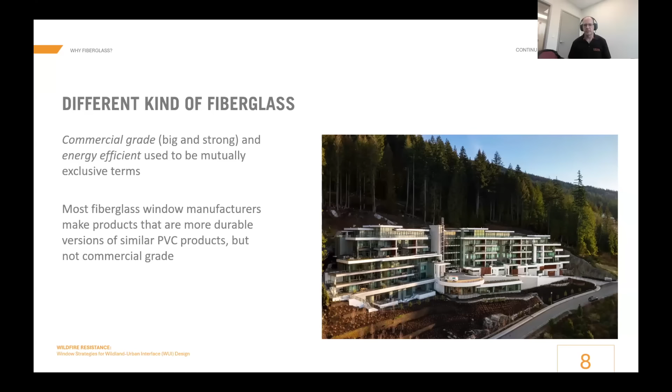Most fiberglass window manufacturers make products that are more durable, but they're more durable versions of relatively similar PVC products. Those fiberglass products are not necessarily commercial grade in the sense of the size capabilities or the resistance to exposure that you'd expect from a commercial product. So we're speaking from a little bit of a niche application here, but the material science is just science.

To make fiberglass, it's made from long strands of glass fiber combined with a thermoset resin. To use another construction material as an analogy here, you might think of reinforced concrete, where the strands of glass represent the steel reinforcing in concrete, and the resin is the concrete that holds it all together and provides a finish and maintains the shape.

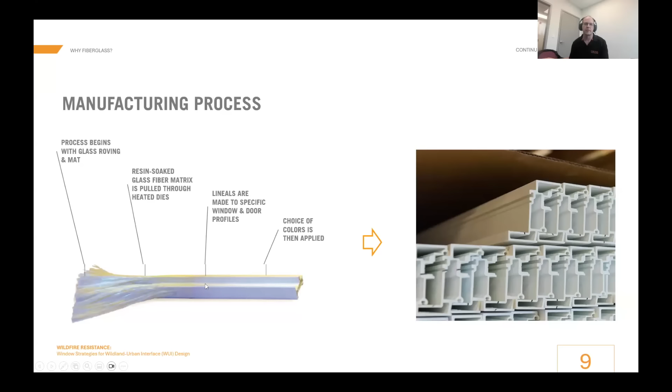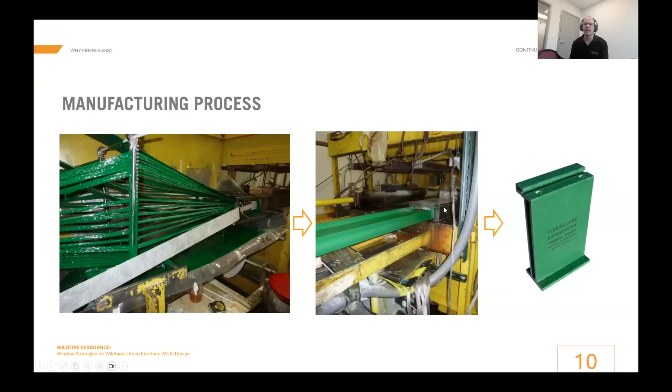The material gets pulled through a die that heats the material and gives it its shape. And finally, you have an unlimited length, two-dimensional profile that you can cut and then manufacture into anything you want.

Of course, in our case, we're speaking about window frames most of the time. And when you look at the end product you can get when you take that material and fabricate it into a window frame, it ends up giving several strength characteristics that are favorable for making commercial windows.

So about 10 times stiffer than vinyl from a structural perspective. The fact that it's a thermoset resin, and more specifically for you chemistry buffs amongst us, it's a polyester. Interestingly, that is a different form of polymer than a PVC or vinyl polymer, which would be a thermoplastic. The biggest difference between those two families of polymers is that a thermoset cannot melt or deform with heat. So we'll just pin that in our mind for a few minutes to come.

Because of its enhanced resistance and stability to high heat or extreme cold, as a finished product it can withstand extreme temperatures without deleterious effects. And it ends up with a much longer lifespan than most other materials from those fundamental properties.

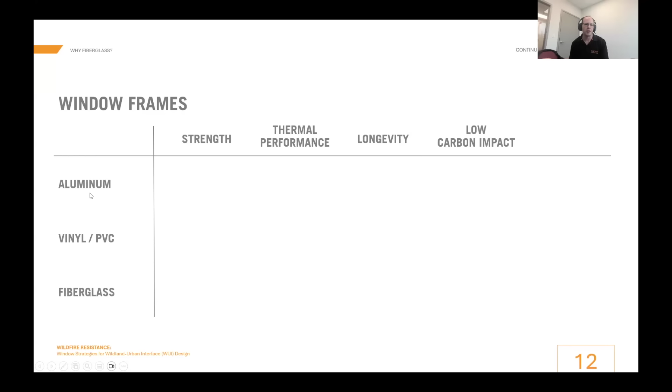So if you start to think about it, to round out the question, why fiberglass in the finished product form as window products? There's a lot of strengths and weaknesses that materials have. And when you're, as a designer or an engineer, thinking about material selection based upon the principal material in a window product, you're trying to optimize for something. You're trying to optimize - in the case you might consider aluminum, you'd be optimizing for strength and longevity.

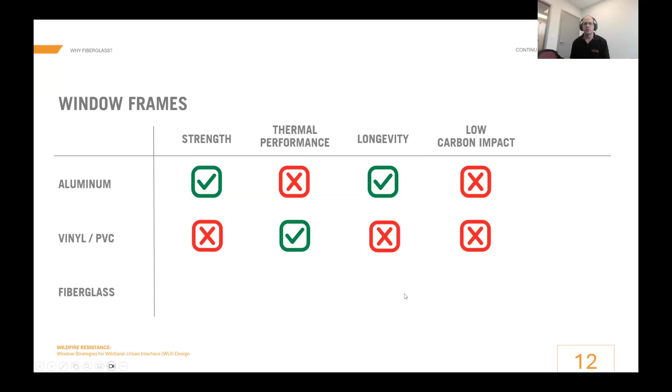If you're trying to optimize for thermal performance, your mind might go right away to PVC. If you're trying to optimize more comprehensively, you don't want any lower points, or you're looking for the lowest carbon impact, you might be looking for fiberglass.

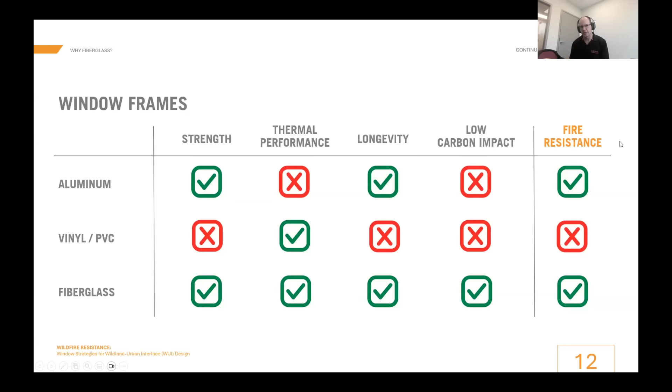But I want to introduce a fifth potential selection criteria that we all might have in this case, and that is wildfire resistance. And if that were particularly interesting to you, you'd be prioritizing metal or fiberglass, as it turns out.

So with that in mind, let's look at wildfire, and we'll start a little bit big picture here, but we'll get to focusing on windows in just a moment. So looking at wildfires, I'm not going to spend much time convincing everybody that wildfires as a problem are a big problem. They're a problem that's persistent, and it is unfortunately a growing problem. I don't need to spend 30 minutes of this presentation presenting evidence to that effect.

But a little bit closer to home, do you personally know someone who's lost a building in a wildfire? I hope it's not you personally, but we have a big crowd on this presentation, so maybe some people have. Most people do at least know somebody personally who has lost a building to wildfire. At Cascadia Windows here, we all do.

that eventually became, or was bought by, our president. Our president was looking for a building to put on a recreational property he had purchased in the province of British Columbia. He just had a tiny little fishing cabin on that. He wanted to improve it to be a big recreational cabin for his family to come and enjoy the lake.

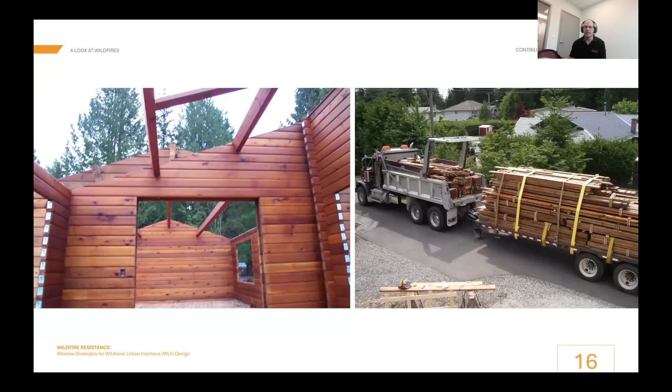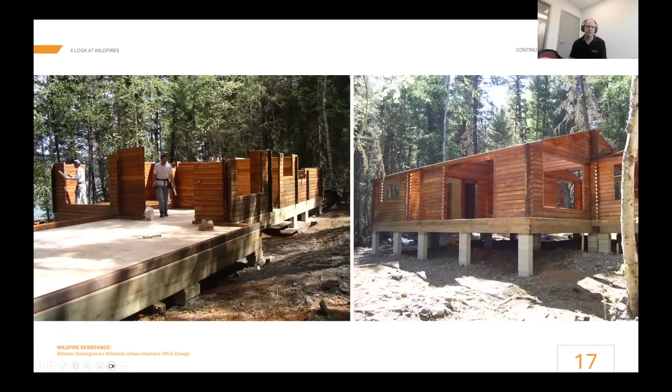So he built himself a map, labeled the materials, loaded them up, took them on a 4-hour drive outside of the city, brought them across the lake to the recreational property. Before assembling the cabin, he built a modern wood frame floor assembly, complete with a few reinforced concrete footings to receive the cabin, and then began to assemble it. And he did. It worked out quite well.

He didn't need fiberglass windows in it at this point in time. He was able to reuse the existing windows because it was just a seasonal cabin. And so he and his family enjoyed this building for about 10 years or more.

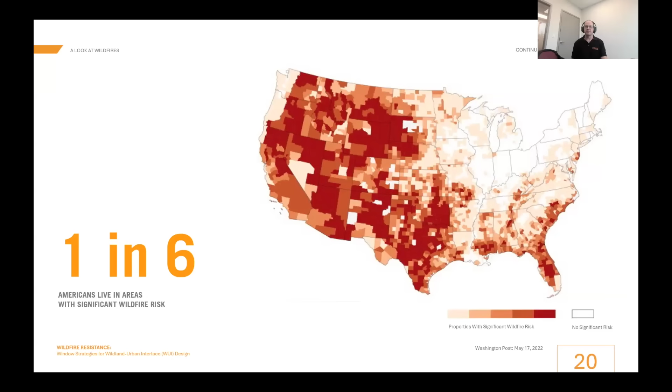So we all know somebody, and this topic is near and dear to us. But it's interesting to note that we think about this topic in terms of that cabin, which was a wood cabin in the middle of the forest. But that's not where the majority of our building stock at risk of damage from wildfire is located. About 1 in 6 Americans live in an area with wildfire risk, so that's obviously far more buildings than the odd recreational cabin in the woods.

So let's look at wildfire resistance of buildings more generally, because it is a more widespread risk. We can see, from all over the globe, that attention on this topic is intense and growing, but not matured yet. Thankfully, we can take examples like this architect in Australia who had enough of seeing communities destroyed by wildfires and decided that from that point forward, all of his buildings, as a basic aspect of construction and design, would include wildfire-resistant exteriors.

It's not building code in his area or most areas yet, but it's important enough that not only early adopters and concerned architects are getting on board with learning and implementing this knowledge, but insurance companies as well, who are doing hard math and starting to change insurance premiums in some areas. It will be logical that as building methods and products become more mature and available, insurance companies will further alter their premiums and discounts in response to the wildfire-resistant character of the buildings they are insuring.

Coming to how we see communities educating their occupants, builders, and designers for resistance to wildfire. This little extract comes from a small community in British Columbia, but I liked it when I pulled it off their website because it taught me a few things. It first showed that this concept is not just about selecting building materials that resist fire. That obviously will be a part of it, but the strategy of wildfire resistance is more holistic.

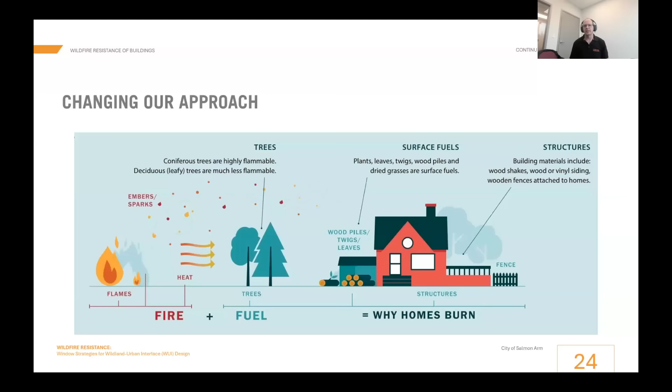This has become useful guidance as we see California, for example, rebounding from the devastating wildfires that caused the loss of many homes. It's interesting to see that studies are being done and recommendations made to include Passive House as an excellent, well-fitted design guideline for as much of that rebuilding as people are willing to adopt. So wildfire resistance and Passive House coexist quite happily. They're not dependent on one another, but we can make buildings better by implementing both.

Which brings us to windows, because they're important in both Passive House designs and in enhancing wildfire resistance. Why wildfire resistance? Because windows are a vulnerability. Thinking about the three aspects of best practice for enhancing a building's wildfire resistance: starting outside the building, there's intentionality about landscaping—that furthest-out surrounding environment piece. Then the second piece, controlling the accumulation of surface fuels, which unfortunately depends on occupant behavior—that's closer to and up to the outside of your building.

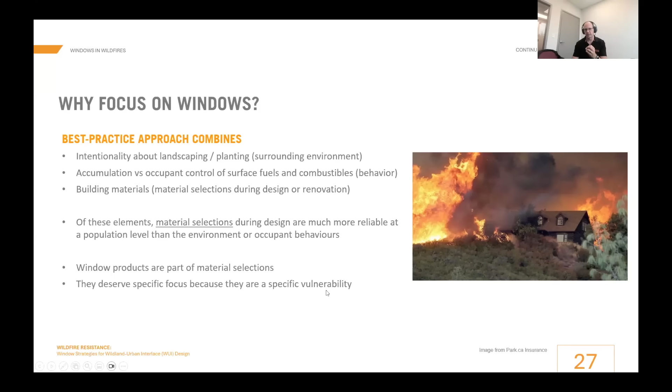Instead, we're talking about the large proportion of buildings next to a wildfire that passes by, giving off heat, embers, or small chunks of burning material that fly through the air and land on a building. If it lands next to the base of a wall, the exterior might suffer or become damaged, but the building wouldn't burn down. But if it lands at the base of a window, it might break the glass, set the frame on fire, and cause the building to be lost from the inside out. That's why windows are a specific vulnerability—they could cause the loss of a building where, if there was a wall instead of a window, the building would have survived.

And that's what happened to the building in this photo. You can see that the outside of this wall, left and right of the window, has not been subjected to a massive inferno of a wildfire completely engulfing the building, yet the building was still lost. It's easy to project that the windows at some location around the building allowed fire to penetrate, and then interior things such as the curtains, the interior trim around the windows, even the furniture caught fire after the fire got through a window.

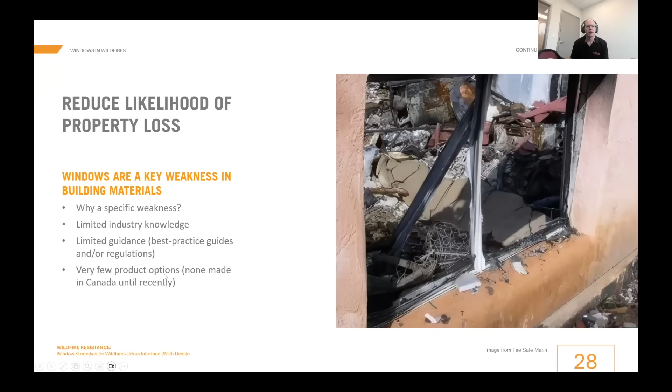So windows are a key weakness, yes. There's limited industry knowledge about them compared to other materials like mineral wool insulation and non-combustible roofing materials. Because there's less knowledge about windows specifically, there's less guidance, fewer best practice guides and regulations—but there are some. At a product level too, there are very few options. Some exist in the United States; none were made in Canada until recently. But again, there's more than zero.

So let's look at how window products themselves, or their selection, can rely on testing or published guidance from anywhere—it doesn't have to be Canadian or Californian, it doesn't matter where the author was living when they created a test standard. In fact, there is a test standard published in California and referenced by codes in some regions. That standard is now being relied upon outside the borders of California, and happily it's becoming useful in other locations around the United States and even in Canada, referenced in some Canadian guidelines. So we do have a published standard that includes testing and how to test a window for wildfire resistance.

So of course that's interesting. But before we dive into that test, what it looks like, and what the results are, let's look at where we see it being referenced. I think it's most interesting to see where it's being referenced outside of the California region, where it's sort of connected with requirements to codes and regional requirements.

Outside of that geography, even National Research Council Canada has created a guide for wildland-urban interface fires for the whole country, and in it they indicate that windows should be tested to the California test standard for exterior windows. Why a California standard? It's the only published one right now, and it's way better to reference a published standard than just talk more generally.

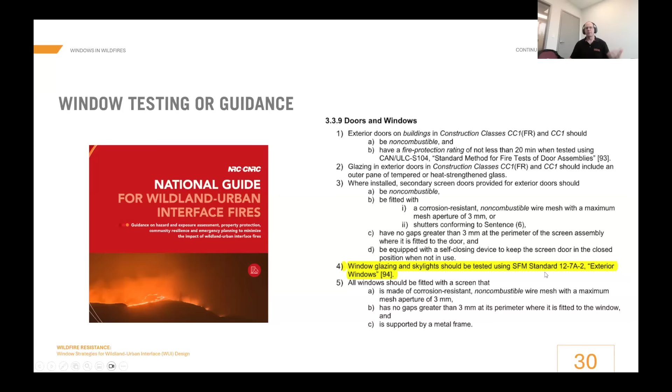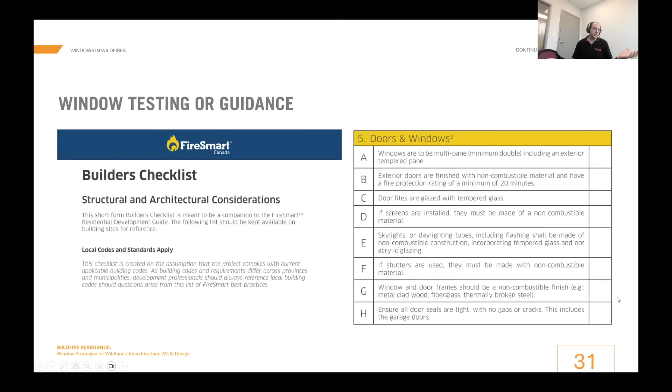Where else do we see references to or specific requirements for windows and doors in published guidelines? FireSmart Canada, a national organization, created a builder's checklist, and in it they talk about windows and doors, not at length, but it's in there. The most prescriptive element says, paraphrasing, window and door frames should be metal or fiberglass. Pretty blunt. One thing that struck me is that it obviously omits wood, but also PVC. Why would that be? I'll show you some stuff in a minute.

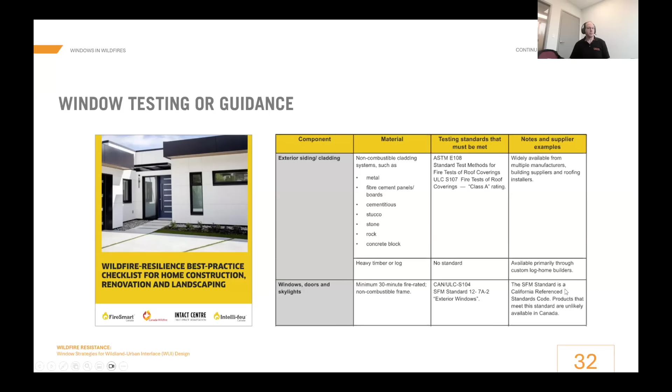Where do we see this from that same organization and others throughout Canada? So outside of the geographic region in California where this test was created for, wildfire resistance best practice checklists even in another country still reference that California-based test. So it's not bad, there's a test, it's useful. It's useful enough that it's not geography dependent.

So what about that test? Cascadia engaged with a study being done by building envelope engineers and fire specialists to submit some windows to be subjected to that test. What's the test? It's putting a window in a non-combustible test buck, essentially building a framed wall, in this case a steel framed wall, putting gypsum on the wall, putting your window in that non-combustible buck, and putting a big burner of fire right below the sill of the window, turned on full blast for 8 minutes.

So what does that simulate? Why 8 minutes? I don't specifically know, but the fire specialist who was with me as we began this testing said that if you have a nearby wildfire, you could have a situation where a chunk of burning material, basically a chunk of a tree on fire, breaks off, and because of prevailing winds and the movement of hot air, blows over to your building and lands at the base. If that's a window, now you have a source of burning fuel right at the base of your window. But it burns intensely and pretty quick, usually 2 to 4 minutes, then it's burnt up and out. So we need to study the short-term but intense effects of a nearby fire. I think the 8 minutes was just taking the upper end of that 2 to 4 minutes and doubling it. If anybody knows the author of that test standard and knows more exactly why 8 minutes is part of it, let me know.

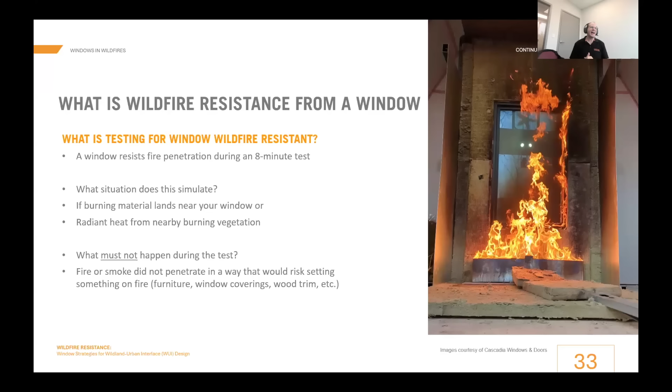But the punchline, what must not happen during this test? If you're on the inside of the window, fire must not penetrate all the way through in a way -- no smoke, no fire -- that would risk setting something on fire, like the furniture, interior window coverings, or the wood trim. This does not mean that after the fire test, the window is as good as new, wipe it off and carry on. No, the window is going to get destroyed, more or less. But the window's job is to take that damage and protect the building behind it.

So here are some photos from our setup and from the testing itself, and I'm going to describe what happened as Cascadia observed the testing in progress. This is preparing the opening before putting in the window, then putting in the window. When you turn on the fire, the glass is going to break for sure -- doesn't matter if it's tempered, thick, thin, it's going to break, just at different time periods depending on what glass it is. But the outer pane of glass, and that's critical, the outer pane is going to break for sure. You just have to make sure the inner pane doesn't.

So what did we learn? More specifically, what did we submit for the purpose of learning? We submitted 4 different levels of window -- let's call this anticipated fire resistance. We designed slight modifications to the same fixed window, dividing our modifications into 4 levels. To get inspiration for picking those 4 levels, we looked at the code in California that references the published standard for the testing.

We noticed that the code doesn't only use testing as a path for compliance. In addition to that path, there's also a prescriptive path that says do this and this and this, like a little recipe, include some tempered glass. So we wanted to build our first level of product, which would be below, therefore non-compliant with the prescriptive standard. Essentially, we're building one window to go and fail.

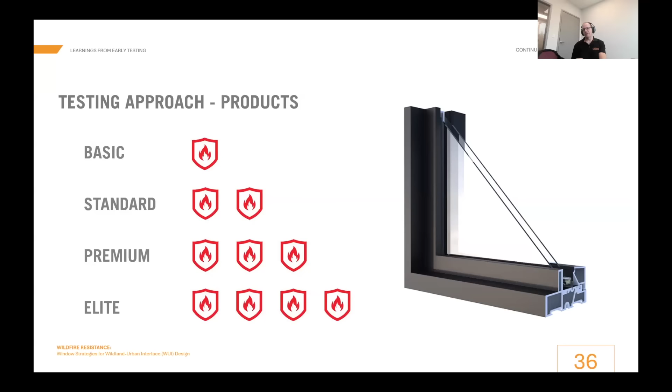And then the final one was, let's go to a laboratory that builds glass for chemistry work and get some fireproof glass, and pop that in there so we can isolate the damage and observations to just the frame. Then we tested these, and they all worked, even the most basic one, which really surprised us. But more specifically, we learned separate things about glass, and we learned about the frames, and in this case, fiberglass specifically.

So what did we learn about glass? Well, just to recap, fiberglass was surprisingly good for our expectations. All four levels worked.

I want to quantify these observations from this point forward. Unless I say otherwise, I am talking about observations taken from a test sample quantity of 1. So for you physics nuts out there, n equals 1, right? This is one test for each increment that we made observations about, which is indicative and teaches us a heck of a lot, but it's not repeated 10 times or even a few times, with the minimum and maximum reported. That doesn't exist yet.

So what did we learn about glass? Well, actually, we saw this throughout all of the testing, and this has nothing to do with the fiberglass frame, this is just good information for everyone. 6 millimeter glass, or quarter-inch thick glass, which is on the relatively thick side for residential windows, that's a good idea. Thicker glass is a good idea across the board.

What else did we learn about glass? Not tempering the exterior lite is fine. It might even be a good idea. And when I say it might even be a good idea, I was previously recommending this pretty hard, like this will actually help more. I watched some test results presented from Underwriters Laboratory that suggest the outer lite could be tempered, and statistically it's not going to be much worse than if it's annealed. But here's my thinking when I first wrote this.

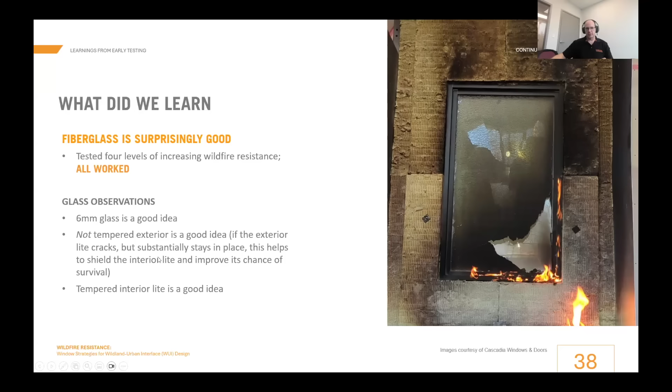So these are more photos from the back side of that same photo I showed earlier. The inner pane of tempered glass did survive. The outer pane, also tempered in this case, cracked about halfway through the test. About 20% of it fell out, while 80% stayed in place during the test.

But as the 8 minutes dragged on, we worried: if 20% of the glass fell out and 80% remained, would the inner pane have survived? Maybe. But if the test went 10 minutes instead of 8, would it still survive? I don't know, maybe not. That's why we think there's a variable there, and we're recommending annealed glass unless you need tempered for other purposes like safety glass on a door.

What did we learn about frames? We learned that heavy, multi-chambered fiberglass frames kind of help themselves. Even fiberglass without any fire retardant passed and fared quite well.

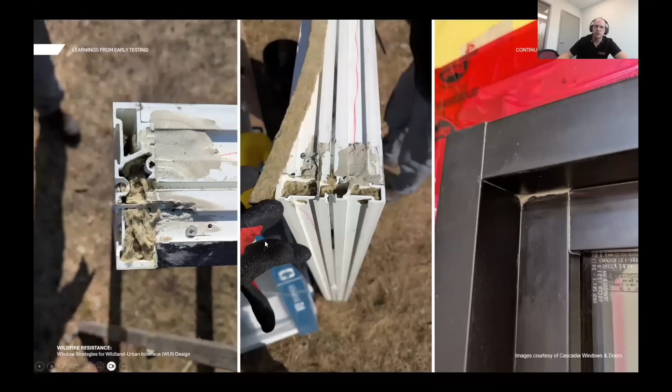I've got some cutaway photos where after the test we used a saw to chop through the fiberglass frame, so I'll show you those. This is before the test.

Before the test you can see we have these multiple chambers. They're normally foam filled, but we put about 2 inches of mineral wool in the more robust version of these for the test. Most importantly, notice there are multiple chambers, not just one big open cavity. Even the glazing leg in front of the glass has two walls of material with an open cavity in between. So what happens when you burn that down?

Well, we burnt it, and in this sample it looks like hairs are sticking out of the surface of the burnt frame, but that's because we took hand tools and roughed it up so we could see underneath. These are actually strands of glass that were in the profile. Before we roughed it up, it doesn't naturally look that way - the rest of the frame is just as it is.

We observed that the outer surface of resin on fiberglass is combustible, so it catches fire and burns away - that's the surface resin that's normally there to accept paint. What's revealed underneath is a layer of glass that cannot burn, and it acts almost like a fire blanket locally to what's behind it. Heat transfers through, but not fire.

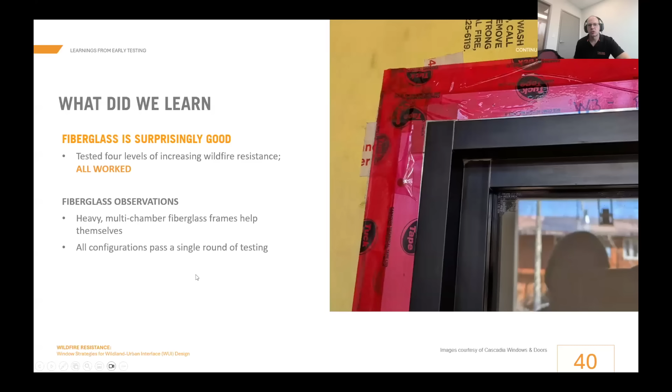So we learned that the inner half of the frame - the part connected to the glass and to the building wall - is protected by the fact that these frames are deep and multi-chambered.

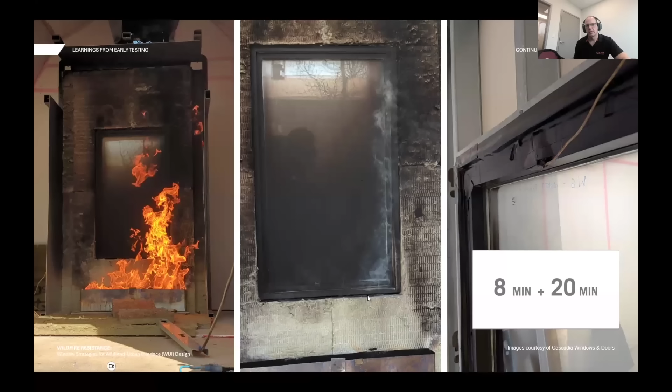We wanted to see what would happen to the frames if subjected to longer than the 8-minute test. For the sample with fireproof glass as the IGU, we did the 8-minute test, took a 5-minute observation period to make sure it was out and take photos, then turned the test back on for over 20 minutes. We sat there getting kind of bored because it takes about 8 or 9 minutes for the outer resin to combust.

Once the resin has combusted and you've just got dirty glass on the outer surface, not much happens after that - I guess eventually something would, but 20 minutes later the frame was pretty much exactly the same visually, and when we cut it open, as it was after just the 8-minute test.

So we learned that not all other windows are going to react the same way. The engineers who invited us to participate in this study also bought some basic vinyl products off the shelf of a building supply store, purchased retail. I'm not going to tell you the manufacturer because they didn't have a chance to participate in the testing or comment, and we weren't trying to play Mythbusters or prove or disprove anything claimed. We just wanted to see the result of doing the same test on products manufactured in North America and commonly available here.

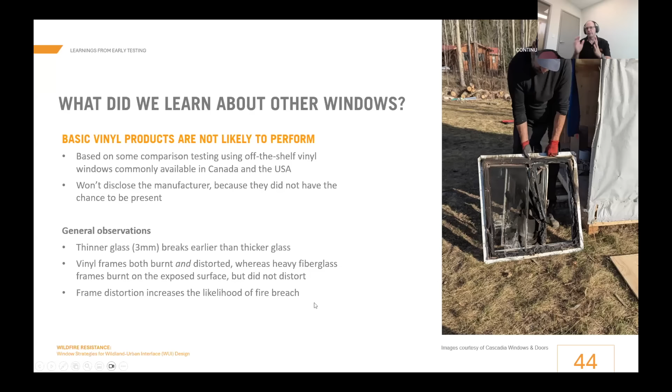We made some observations. Thinner glass, like 1/8 inch, breaks earlier than thicker glass. We also noticed, importantly, that vinyl frames both burnt and distorted with the heat of the fire, whereas heavy fiberglass frames burnt on the exposed surface but didn't distort because fiberglass doesn't melt or deform with heat. Thermoplastics do. We observed that frame distortion increases the likelihood of a fire breach, because if you have a sash and a frame and they distort, they open up a gap between them where fire can penetrate.

When you think about the material characteristics of those two samples: with vinyl, there is a glass transition point where the material hasn't melted yet, but becomes soft and rubbery. That happens at about 180 degrees Fahrenheit. Fire breach can occur because it becomes soft and rubbery and doesn't support load the same way it does at normal surface temperatures. It melts at a much higher temperature and ignites even beyond that.

736 degrees Fahrenheit was roughly the average that a Google search returned for vinyl's ignition temperature. Fiberglass is quite different at practical levels—it doesn't have a glass transition point, it will never become soft and rubbery, and it cannot melt. It will burn at a slightly higher temperature than vinyl, but it will ignite and burn just like vinyl. Full disclosure: the temperatures experienced during this testing on the outside surface of the windows were way beyond these ignition temperatures, so this is not a test of whether the frames will ignite—the frames will ignite for sure.

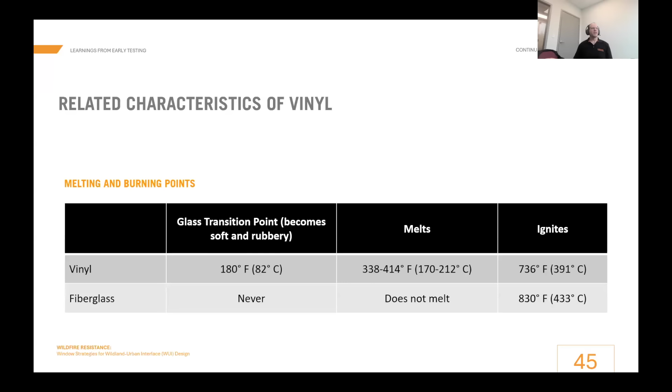An aluminum window will melt the thermal break and then set it on fire. A wood window will set on fire. This test will set your window on fire. But overall, how the frames fare during the test differs based on the frame material.

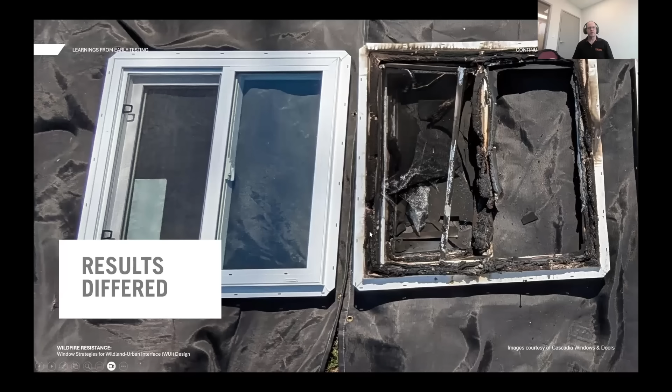So this is the vinyl frame before and after.

As a couple of closing comments before we dive into questions, I'm pleased to describe some interesting early-stage research I saw, with some manufacturers engaging with that same research team to bring more to the community. They were trialing temporary window covering materials on both fiberglass and PVC windows, trying to identify a base material for a product that could be offered to existing owners not ready for window replacement or retrofits, who could keep an affordable product in their basement and, if evacuated, hang or bolt it temporarily in front of their windows to increase survivability for windows not likely to survive otherwise.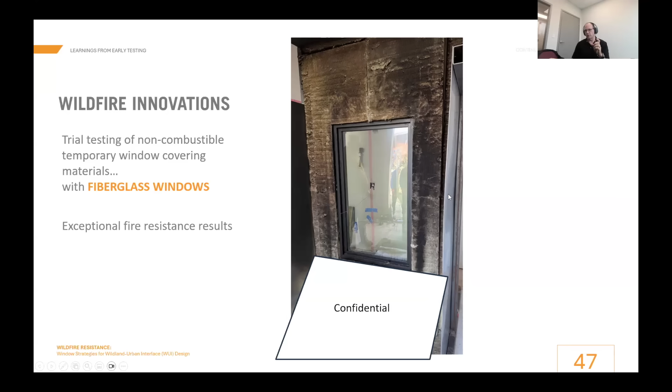We tested vinyl and fiberglass windows with these covering approaches. For the fiberglass window with a consumer-level covering product, after the test the window was perfect—you could have wiped it off and continued using it. The interior seals of the IGU between the glass and the spacer bar didn't rupture, and the paint was okay. It was quite impressive.

So the key takeaway from this is that we as a design community can identify three layers of controls where designers and building owners can enhance fire resistance. Surrounding environment, close but beyond your building, is one area. Surface combustibles, including stuff right next to your building, is the second area. And building materials is the third area. You have at least partial control of these, almost always. That last one is most important during design, because you're making decisions that last a long time.

Target weak points. This is not a new concept introduced just related to fire resistance. Targeting weak points is something that Passive House is built on.

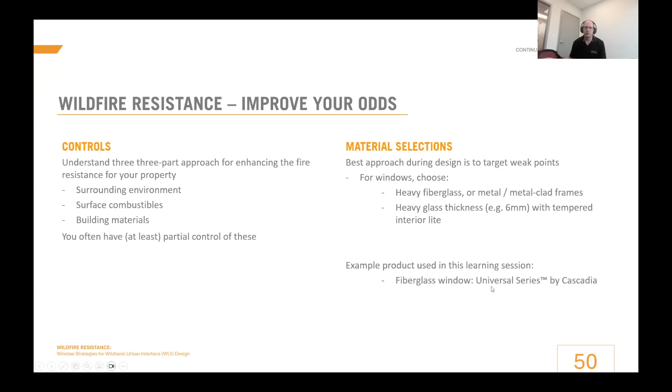But for windows, related to fire, choose heavy fiberglass or metal for your frame system based upon what we have seen so far in testing. And related to glass, choose relatively heavy glass thicknesses, such as 1/4 inch or 6 millimeter, and above all, temper that interior glass lite. So for full transparency, the example product used in the photographs in this learning session, the fiberglass window, was a product line called the Universal Series, manufactured by our company, Cascadia.

And lastly, before we open up to questions, what did Cascadia do about these learnings? Well, number one, we identified more testing and are investing in it, and that will be occurring in the next couple of months. But we also did something for specifiers who might be interested in reacting right now based on the information now known.

To help those amongst you, we developed 2 variants to our product line. Without any enhancements, our regular Universal Series was referred to as just our normal product, but we can enhance it to the point where it will pass that test with certainty. This is just a few minor enhancements, including that the glass package meets the minimum that we saw successful.

The estimating team charges a few percent, 2, 3, 4%, for that wildfire resistant standard option. It's a good wildfire resistant option, and you don't have to be just building a cabin in the woods to make use of this. You can have this on any building.

And then for those of you who are building your own cabin in the woods and want something a little bit more enhanced, that also passes the same test. Quantifiably, I can't give you numbers, but the main difference is it's built with a fire-resistant resin in the fiberglass frame. So longer time to ignition, shorter time to self-extinguishing, less flame spread, but they both pass the test. That second option would cost a buyer about 8 to 10% more than the baseline.

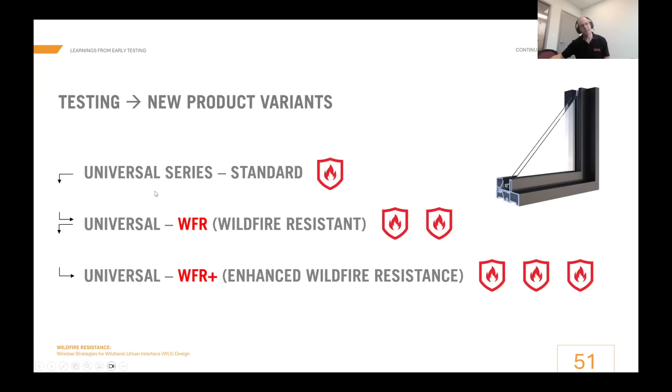So that's what Cascadia did with this information, in the same year that we learned it. That's it. I now welcome your questions, and I know there's a number of them in the chat. Zach and team, please curate as you wish.

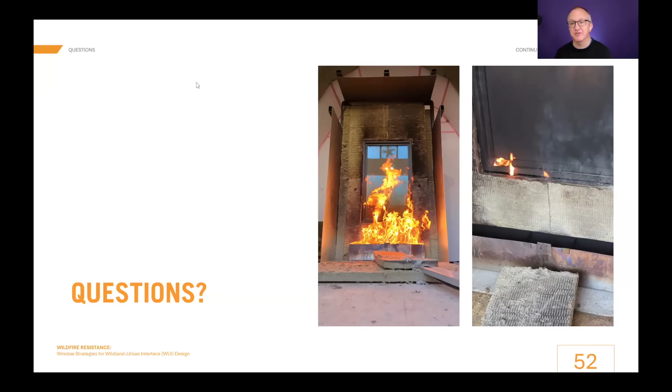Yeah, absolutely. Well, Michael, fantastic presentation. Thank you very much. And yeah, there's lots of really thoughtful questions and comments in the chat. People who have been impacted themselves by wildfire and who are thinking very thoroughly about how to respond and create more resilience in buildings. So I think we're in for a really great discussion coming up here.

So let's start with Stefan. I hope I got close to pronouncing your name correctly. I know you had 2 questions, maybe we could start with one and then follow up with a second one later in the queue. Stefan, if you're able to unmute yourself, that'd be great. Good morning. It did take a little moment. Thank you very much. No worries.

Yes, thank you for the presentation. Quick question: what would be the difference between the Californian standard and European standard when it comes to fire resistance? Is the Californian standard the only one in that context?

That's a great question. The short answer, unfortunately, is I don't know. And because I don't have a good answer for that question, I love your question. It's going to inspire some more research and learning for Cascadia.

I can tell you why Cascadia selected the California standard to follow, even though we're a Canadian company. We sell products to the California market, the entire United States, and also the whole Canadian market, where there's been adoption of and reference to the California standard. The European standard is useful and interesting, but at our early stage we haven't used it as the basis for initial learnings because it's not referenced in the best practice guides where our own domestic regulators, though not yet making this code, are publishing recommendations that indicate to follow the California standard. The short answer is I don't know what the specific differences are.